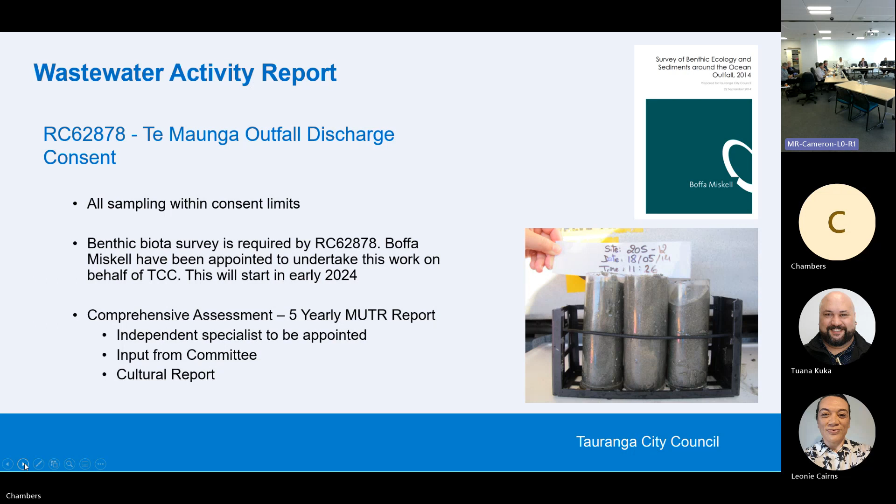There's a certain level of good weather that's required for contractors to get out there and take samples etc., so we're looking to do that towards the end of the summer when we've got some settled weather. That report will come back to this committee as well.

The second one is a 5-yearly report that we're required to undertake. It's got a fancy acronym, MUTR report — essentially monitoring and upgrading technology review report. It encompasses pretty much anything and everything to do with the wastewater scheme and the consents that we have, and how the council have been managing their scheme through the intervening 5-year period.

It's timely that some of the things we'll be talking about later around biosolids and certainly with the PVC, and where that's going — everything seems to be coming together at the same time. We're bringing these discussions to the committee, which is good news.

So at the next committee meeting, we're going to have Becca come and present to the committee. As part of this 5-yearly review, we need an independent specialist in wastewater schemes to be the technical lead for the assessment, and that's previously been done by Becca. So we're going to get them to come and have a chat to the committee about how they go about that, what they're looking for, and what's included.

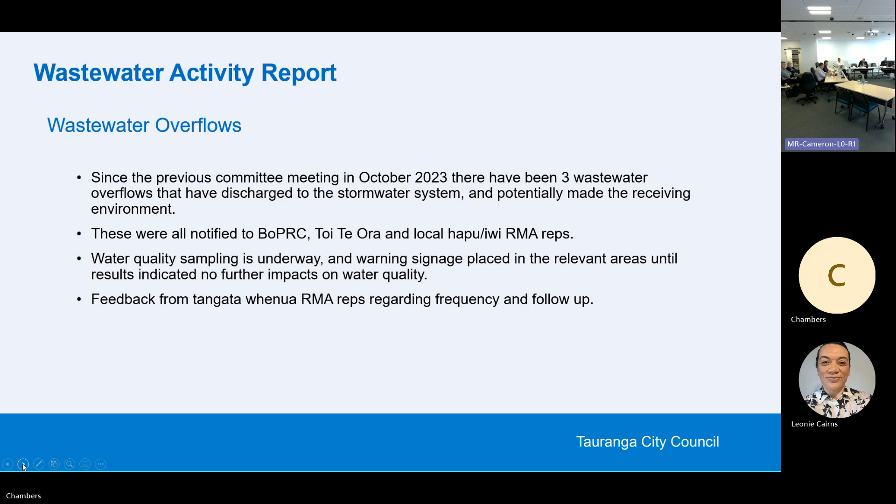I added those two reports in case you need some bedtime reading, but it was really just an indication of the sort of things those reports are involved in.

So pond 1 desludging, that's still continuing. That's been going on since August 2022. The contractor has now taken that figure since the report, it's probably up closer to 8,000 dry tonnes now. They're working 24 hours a day.

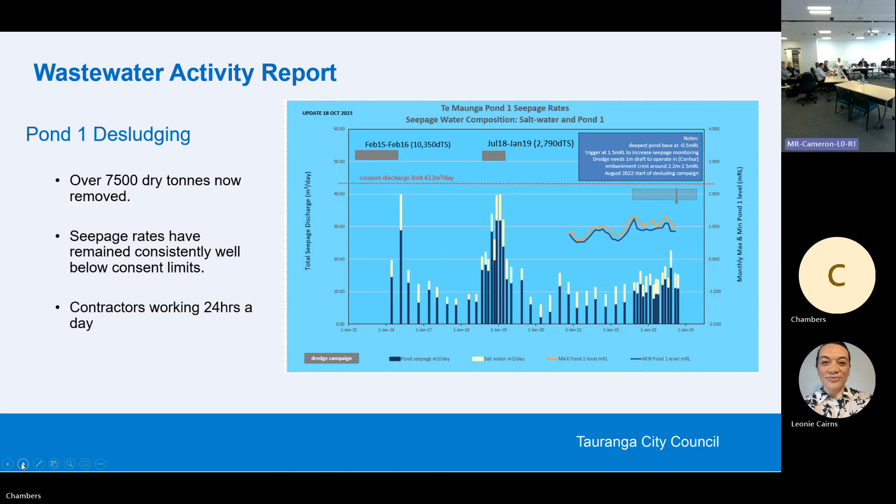At this stage, it's expected that remediation will be finished towards the end of the first quarter of '24, and the above ground works will take approximately 15 months after we've completed that. So still a little way away from having a second bioreactor commissioned.

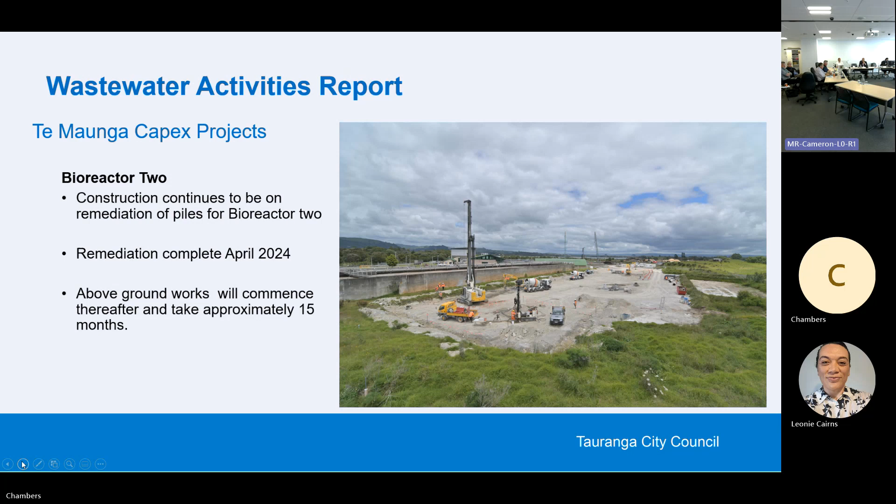Clarifier number 3 is progressing really well. As you can see from that photo, we've got sheet piles in, dewatering systems going well, and we're looking at getting pile installation underway.

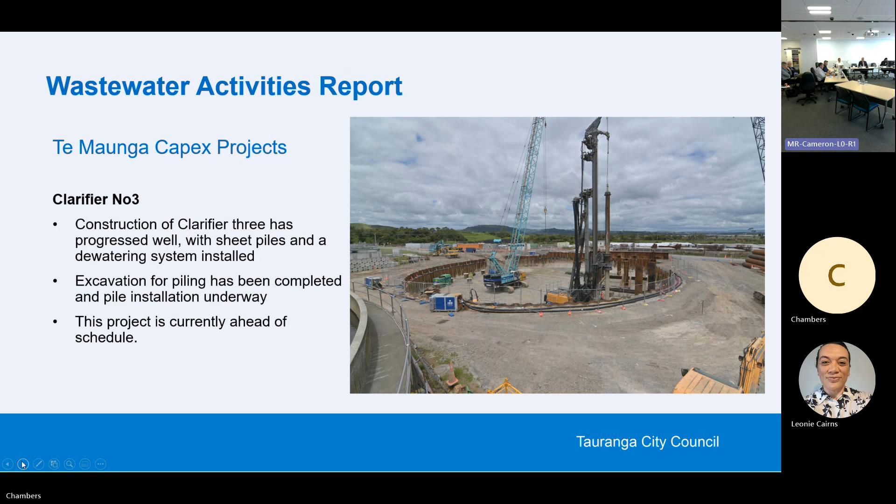We're hoping we'll have design starting towards the end of next year. So we're still a little way away from that as well.

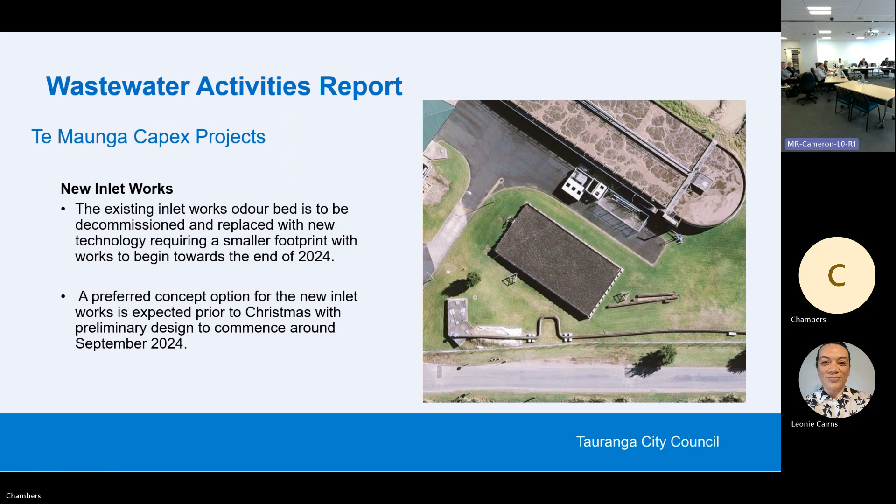Over the last 12 months or so, we've been doing a condition assessment of the marine outfall. I think we've brought you photos of rovers heading down pipes, and obviously those that were at the Water NZ conference would have heard a bit more about that from the presentation given.

So that's sort of done, but we also need to do a dye test which will show us whether we've got any particular issues with the outfall in terms of cracking or seeping. That needs very favourable conditions, not something we can do with any sort of swell or bad weather. So again, that's probably going to be February that we'll try and do that. We're sort of waiting for good weather.

Bioreactor 3, at the moment we're just doing preliminary site assessments, and some geotech and groundwater investigations will get underway next year.

So we've sort of talked about PVC, and that's after our discussion earlier. The project team will come back to the review committee in February to discuss those outstanding matters and move on to the next stage, which is long list options.

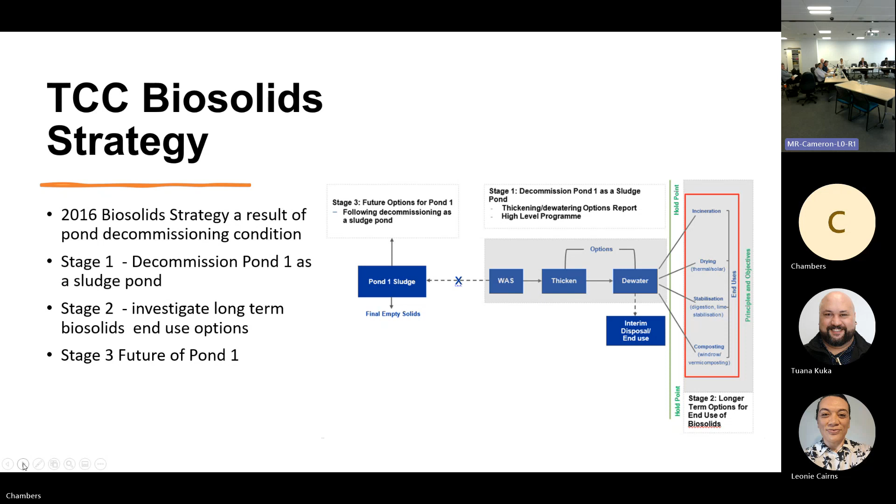Stage 1 was around decommissioning the pond, and council ended up... can I get you to move on to the next slide please?

In 2019, council commissioned the thickening and dewatering plant down at Te Maunga, and that allowed council to stop disposing of the waste activated sludge from the plant into pond 1.

From then on, we were thickening and dewatering the sludge, and then disposing of it off-site, initially to Hampton Downs landfill, and then over the last 3 or 4 years, an increasing portion of the solids have been going to vermi composting.

Stage 2 at the time was about how we were going to thicken and dewater the sludge, and what treatment options were available. We had a whole list of things like incineration, stabilisation, composting, vermi composting, solar drying, thermal dryers, anaerobic digesters. Everything was on the table, I guess.

But it's not just around what you do with biosolids. Once you've done all that, what do you do with it? So we were also looking at end use options, whether we use it for energy generation, building materials, application to land, or rehabilitation of land. A number of options there.

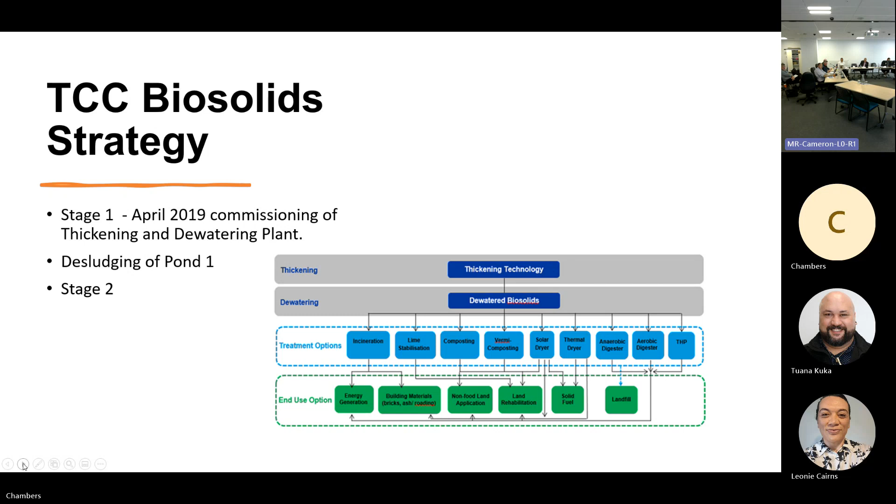As I said, we've slowly moved away from landfill, which not only is a poor use of biosolids in terms of the resource, but it's also probably one of the more costly ways of disposing of it. As legislation comes in around increasing waste levies, that option only becomes more expensive. There's also the transport, which has its own carbon footprint. All these things make that option less attractive.

Currently, council has contracts in place for 90% plus of our biosolids to go for vermi composting. There, the biosolids are mixed with some sort of carbon - for example, in Kawerau it's the paper mill that supplies that portion. That's mixed, goes through the worm treatment, and then is mixed again with more natural compost before it's supplied to a variety of land applications, for example here at fruit farms.

Sorry, let me just go back slightly. That's really working well for council and also for the contractors at the moment, but there are always legislative changes that could hinder that end product use. So council is trying to identify other potential alternatives. One that we've had in the last LTP, and also in the draft LTP going out for submission, is around solar drying.

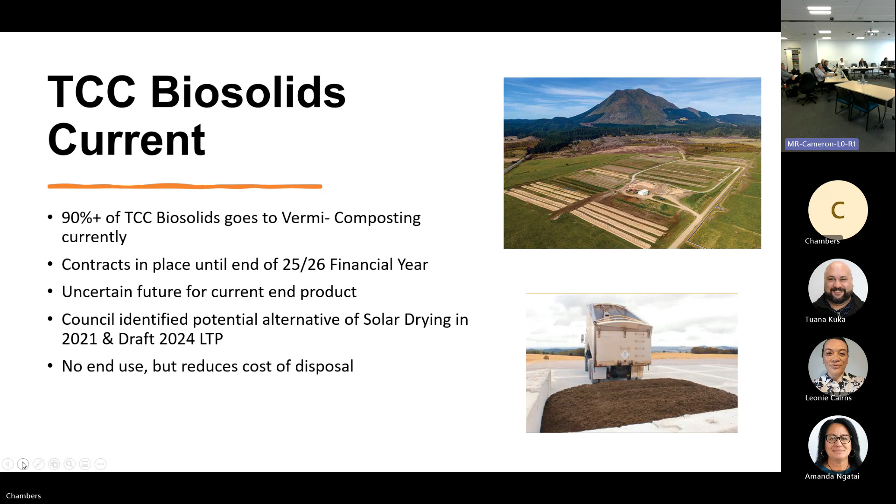We've got to demonstrate an example of that later on. Billy.

What would the odour effects of that solar drying be? You know, close community there. Again, I'm thinking we might be a bit smelly there. If you answer that.

Yeah, it's a good question. So we visited a solar drying facility, and there's no doubt it does have an odour, just like in most wastewater treatment plants, but that's not to say it can't be managed and mitigated with a variety of processes.

So, what might the future look like? Say we've got the vermi composting in place at the moment. As I said before, disposal to landfill is a bit of a wasted resource, and there are a variety of both existing and new technologies out there.

And this is not just a Tauranga issue or a New Zealand issue - it's a worldwide issue that communities need to figure out what they're going to do with their biosolids.

One of the things pertinent to keep in mind is: what's the end use? It's all very well looking at new technologies and modifying the biosolids to a certain extent for a particular end use, but if you don't have a market for that end use, then it becomes a bit academic. So it's around trying to look at both what the technologies are, but also what you might end up doing with the product in the end.

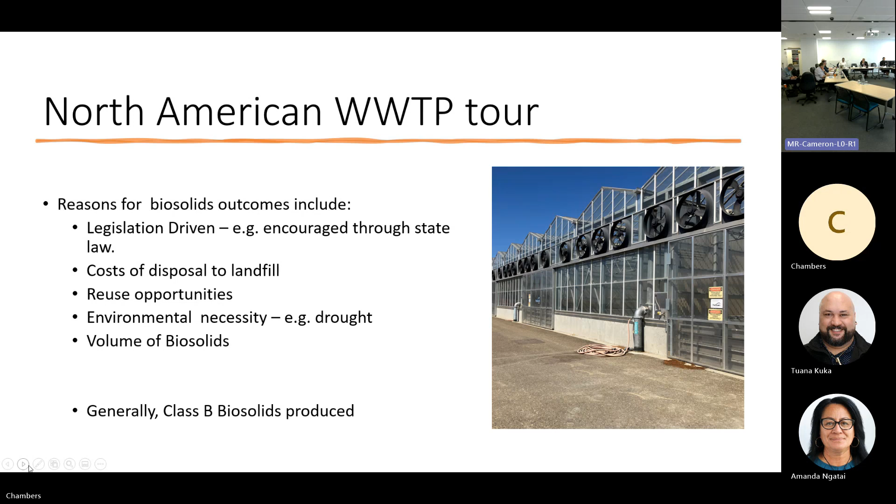The idea was to go from the end use, look at the number of end uses, and decide on the technology afterwards, because there's a whole range of technologies, but it's the end uses where you have either the problem or the solution. What we were hoping to find is someone actually getting revenue from the biosolids, as opposed to it being a cost.

So many of the plants we went to are called water resource recovery facilities - they've renamed it, it's no longer wastewater, it's water resource recovery. It's all in the name, but the branding is quite important, and I'll come to that shortly.

There's quite a lot of technology improvements going on. Biosolids have been ignored for quite some time, but they're becoming more important because as you increase the level of treatment of the liquid stream, you actually generate more biosolids - the two go hand in hand unfortunately. The better the treatment, the more biosolids, so you've got this compounding issue, and you've got to watch out for the carbon footprint on the way through with the emissions.

So we looked at digestion, which is of course happening at Chapel Street, and there are several ways we thought about how you can increase the amount of gas generated there. We didn't talk much about Chapel Street, but it's already got digesters, had them for about 30 years. Several different technologies were listed here - won't go into them - but this is a pilot plant, believe it or not, that we saw in Vancouver.

At the Lulu Island plant, they are piloting these, and they were more than welcome - they said come and have a look, let us know, we're very open with what we're doing. So that's the sort of introduction we're trying to get for Tauranga, to get ahead of the game by forming these partnerships with organisations that are doing some pretty clever stuff, as you can see there.

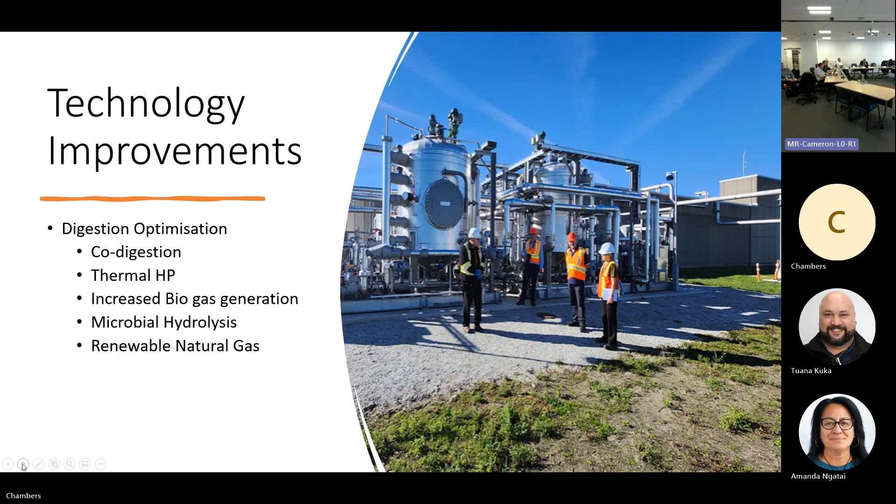Some of the emerging technologies, these were the exciting ones. I've got a couple of samples here that managed to slip through customs. No, I did. And look, this is what's called biochar.

It's effectively carbon, a carbonized form of biosolid. It starts out as sludge at around 20% solids, 80% water. It's dried in batch dryers, then taken up to 1,000 degrees, which kills all the bugs.

It also produces a syngas on the way through, and that syngas becomes the fuel, so this is pretty much energy neutral.

As you pass this around, this biochar product is virtually pure carbon, but it also still contains the phosphorus and some of the good parts of the biosolids, which normal biochar made out of wood doesn't contain. So it can be used for agriculture, and it can be used as carbon black.

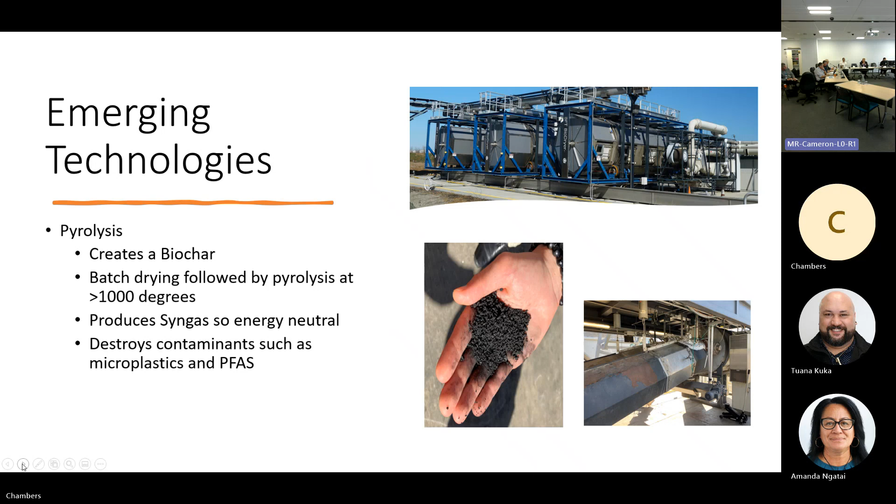Next slide please. Or it can actually be incorporated into... oh, where's the concrete? Oh, it can be later. Okay, that's all right.

So we've got some uses, but carbon black is traditionally made out of petroleum. So there is an opportunity to actually sell carbon black at quite a good rate of return to displace carbon black. And these are examples of little notebooks where the covers have been dyed with organic biosolids.

So it's quite exciting for me. You can tell I'm quite excited about the fact that we've taken a waste product and turned it into something with value. Now that's the turnaround we want to try and get. And if we can get Tauranga into that space of being the leaders in this, then as Radley says, we can get ahead of Watercare with its 350 tonnes a day of biosolids.

So with the previous slide, we had a talk with the producer of this particular material, and they are shipping some of the material out to test as a concrete additive.

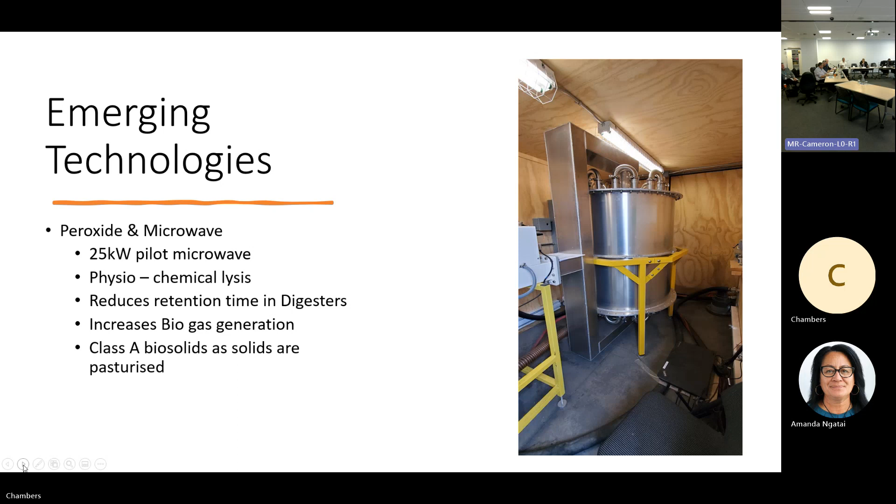Next slide please. This is the clever branding. Americans are pretty good at that, as you know.

This is called Our Carbon. This is the product that's in that little bottle, which, if it gets wet, doesn't smell because it's actually pure carbon. It can be used in agriculture, can be used, as I said, ground up and used as carbon black. Or the most promising one for New Zealand is to lock it into concrete, and you're then sequestering the carbon.

So you've taken the organic material, which going to a landfill would produce emissions, and you're actually taking it through a process that's energy neutral and producing a product that you can then sequester into concrete. Now in America, you can get a carbon credit for that. We're not quite at that stage yet in New Zealand, but trying to avoid carbon cost to the city by actually getting a credit through selling this is one mechanism.

So there's quite a strong economic discussion to go on about how you actually maximize the value of the biosolids rather than the costs. Minimizing cost versus maximizing value is a little equation we're starting to think about. Thanks.

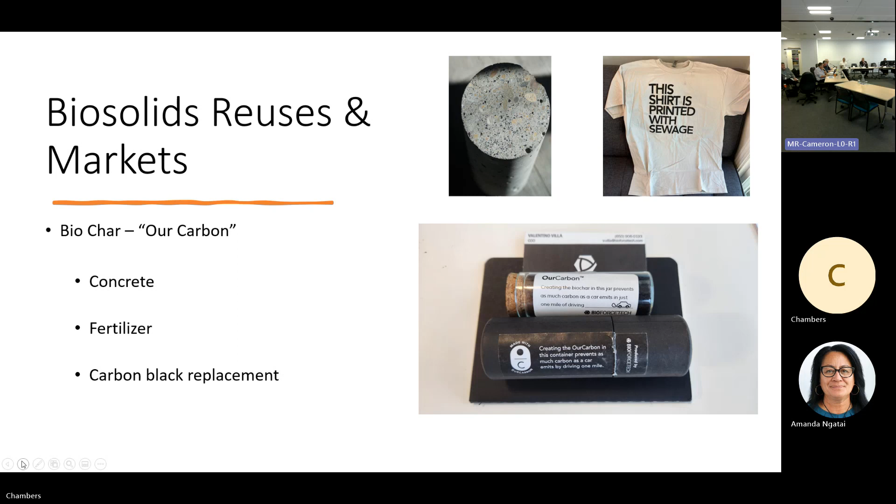The other one that we looked at was the use in horticulture or agriculture. We do have a bit of a problem in New Zealand that we only probably dispose or put to land maybe 20% of our biosolids in total.

So we looked at three locations, two of them shown here, where you take the biosolids down to dry solids, maybe 30%, 60% or higher, without drying to the extent of biochar. You can spread it onto pasture, then crop the pasture for haylage or lucerne, or grow poplar trees. That grove on the left-hand side is something like 450 acres of poplar trees, grown by the utility and sold for ornamental woodwork, like on the wall here, either plywood or woodwork.

Now we're going to start thinking about what wood could we grow that will suck up the nutrients and water, but also be of value. But it does need land. So the question is just how much land could someone like the council own and then harvest a crop that has a value in itself. You can see the husbandry that's gone into the trees, lovely straight trees.

On the right-hand side, this is even bigger - something like 40,000 hectares of forest in British Columbia, where that machine there, a modified log hauler, has been modified to spray sludge into the trees. That's a joint operation between the water utility and the forestry company. They get the benefit of faster growing trees, and the water company has the benefit of somewhere to put their sludge at virtually no cost.

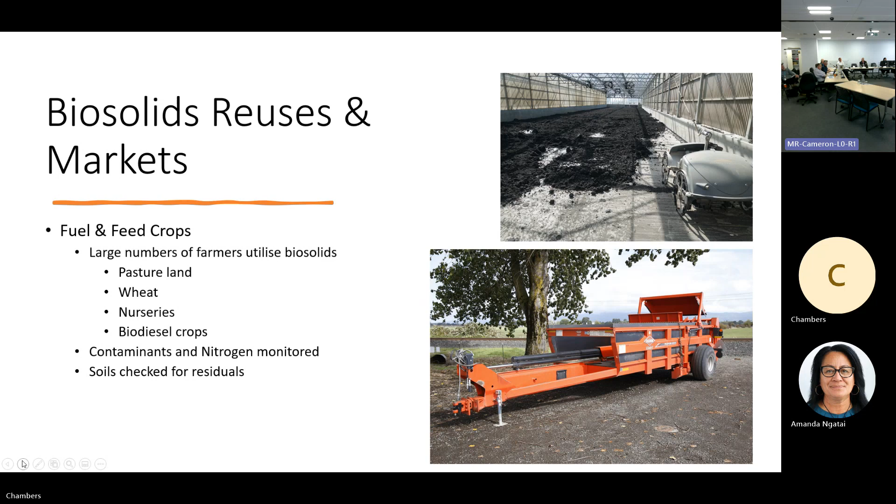Yeah, so I was just going to come back here. So biosolids was ever present on the discussion table at WEFTEC. Some of the things coming up, not just around biosolids but the liquid stream, were around contaminants of emerging concern. There was quite a distinction between the east and west coast in terms of their priorities - the west coast were looking at how they could utilise the resource, and were very involved in finding avenues for land applications and other ways of doing things.

The east coast had probably had some more regulatory driven reasons for what they were doing, and some of that was around quality. Emerging contaminants was quite high on the list, things like PFAS and microplastics. One of the technologies we saw, the pyrolysis that creates biochar, gets to such a temperature that it actually eliminates those contaminants within the biosolid biochar.

Decarbonisation was a big topic, and that feeds into a slide coming up around renewable energy and increasing biogas for use on plants, climate change, and the regulations I was talking about. So it wasn't just biosolids we saw when we were over there; all these plants have got a liquid waste stream as well as their biosolid stream.

A number of cities, especially in the California area, have what they call the purple pipe network, which is an ability to use recycled water. The plants have different processes to get to the stage where they have an effluent to use, but a large number have some sort of tertiary treatment that enables them to use and recycle that water, whether through filtration or disinfection.

Brentwood uses their wastewater on all their parks, plants, trees, playgrounds, and sports fields, and they even enable the community to come and fill up their own tanks with recycled water.

I imagine it's quite a lengthy signing process to gain access. There'll be some limitations about what you can use it for, and we didn't actually get to talk to anyone who was using it, but you essentially sign up to gain access, and you get a card and can fill up like with your car. We understand it was free, but the card wasn't just your credit card - it was more, I think, to do with liability, so they knew where the water was going and that you took so many cubic meters or gallons at such and such a time. So they had that sort of product chain, if you like.

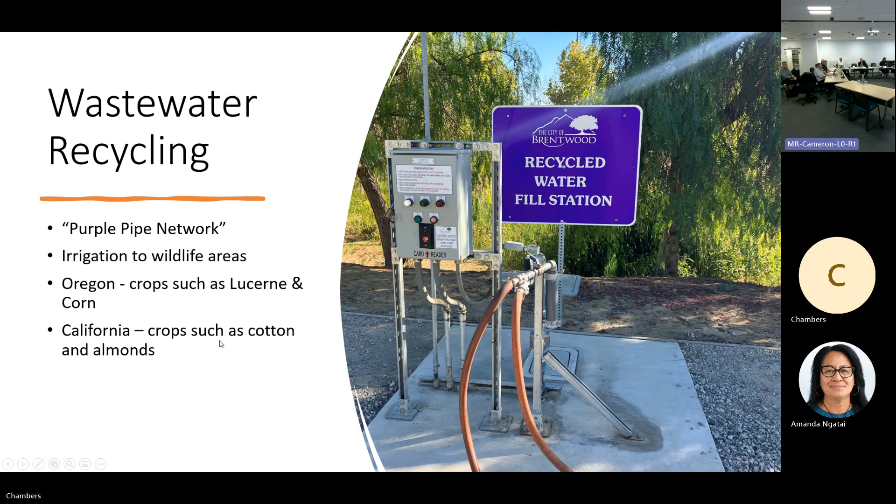They were also bringing in what's known as co-digestion—high strength industrial waste that would otherwise go to landfill. Not quite cans of old Coca-Cola, but similarly high strength waste, like an octane booster, which enabled the digestion process with the existing volume to produce more gas and more power. They were doing the best for their community by saying, 'bring your high strength waste to us,' cleaning it up and screening it to make sure it was okay to go into the digesters. Several other plants in the States are doing the same thing—it's called co-digestion, bringing in high strength waste to supplement the human wastewater.

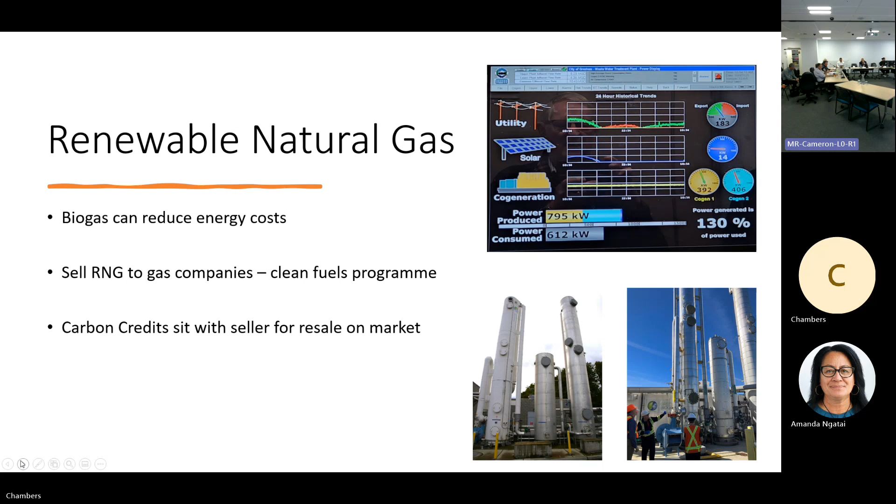It was all essentially buried. Up until about 5 years ago, that's the city of Victoria on Vancouver Island - they were discharging screened raw wastewater to the harbour through a long outfall. The government then imposed a secondary treatment standard on them. They looked around and said, well, this is where all our waste arrives at, so they put a completely enclosed treatment plant on this spectacular point of land, which used to be an old fuel depot. It's interesting how quickly things can happen once a regulation comes into play.

Any further questions, Bradley? Great presentation, lots of exciting ideas. Looking forward to hearing the ones that are commercial and self-funding. Yeah.

I think the timing's really good with the discussions that I hope we'll have as we go through the unit report and PVC, and yeah, there's some really interesting stuff out there and a lot of opportunities. Bradley, you mentioned at the beginning of the presentation about provision in the draft 24 LTP.